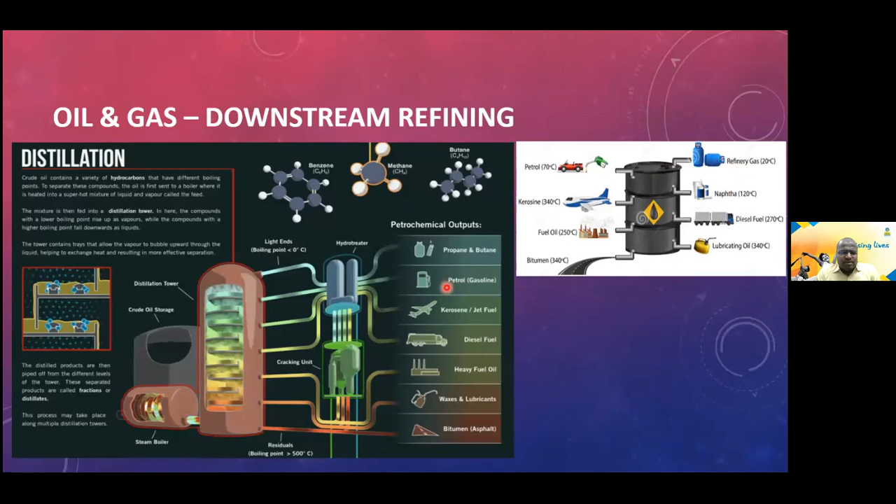Based on the distillation cuts, we do refining and take all the products out from the crude oil. So this is the first basic unit of any refinery, a crude distillation unit.

And this is one sample refinery configuration of BPCL. This is the current configuration - we have got 2 CDUs and 2 trains. So one CDU has a cracker and there is a diesel hydrodesulfurization unit.

And you've got a hydrogen generation unit, and there is a cracker, and we get the lubes. We basically have 3 crackers, out of which one is a hydrocracker, and we make lubes out of it.

Lubes is one of our products, and we also have CCR, continuous catalytic reforming regenerator, which produces maximum hydrogen from our refinery, and we use it for our hydrodesulfurizing units - DHDS, DHT, and hydrocracker - and make the final products out of these units.

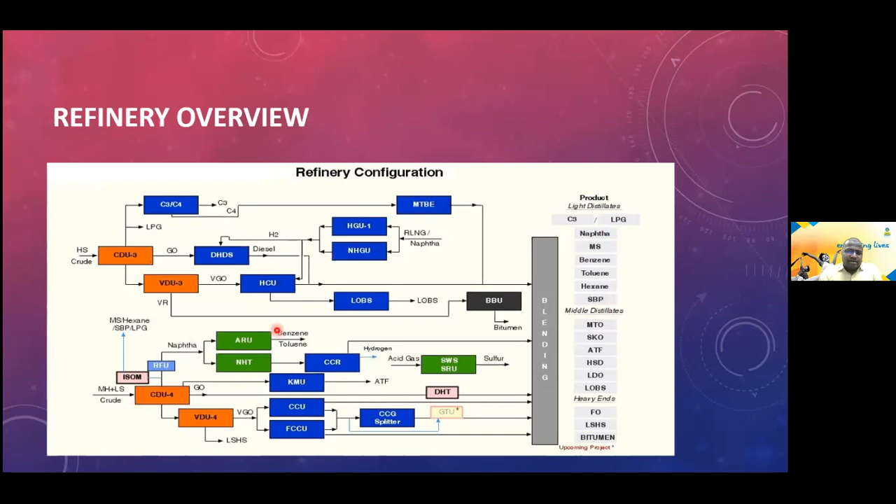It's just a basic refinery configuration of how our refinery looks.

So to begin with, process control. Before going to advanced process control, let me give a small introduction about process control, how it actually works, and how it is known to everyone - just as a refresher, let me explain what is happening in process control.

There is a panel officer, an engineer sitting at the DCS giving a set value, and there is a controller that sees the set value as well as the process value coming from the field transmitter - these are all numbers, like how the current and voltage come into the controller.

So it senses the difference, the set value minus the process value. It takes that error, and this controller, based on the PID algorithm - proportional, integral, and derivative - calculates the manipulated variable. It tries to minimize error. It's as simple as that.

So the set point is entered by a panel officer. The process value is given from the field instruments, and it moves the manipulated variable. This manipulated variable also goes as a signal, a current signal in 4-20 milliamps, and finally goes to a control valve where it operates the control valve.

That current is converted to pressure, what we call I to P, and based on that sensing element, or the input given by this controller, the controller takes action. Once again, the feedback goes back to the controller. So it's a cyclic process.

So we all know how a PID controller works. The output of the PID - proportional, integral, and derivative values - is the final MV given by the controller.

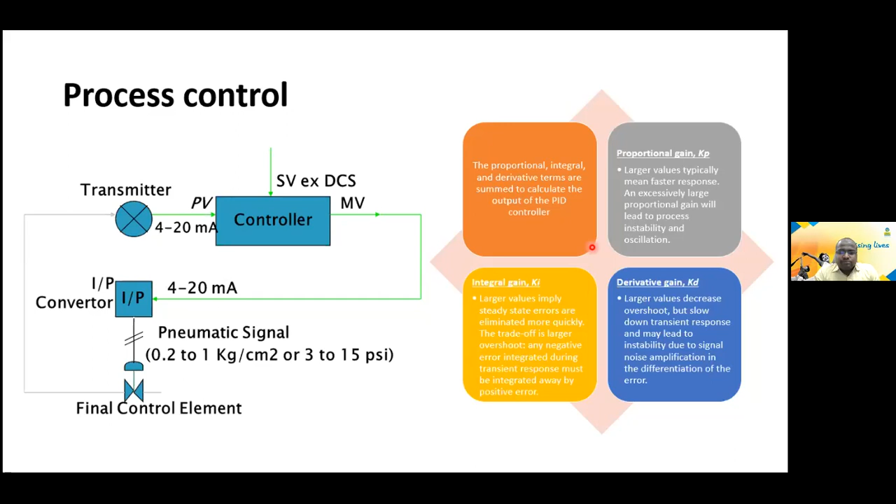It dampens the oscillation, and the controller performs satisfactorily to what is desired. So this is basic about process control.

In a refinery, it's not one process control we have. We have got process control for almost every part of a refinery, like flow control, level, temperature, pH control. There are n number of controllers. In this block, there are many controllers in a single unit, but the action is done by a simple controller, as I explained in the previous slide.

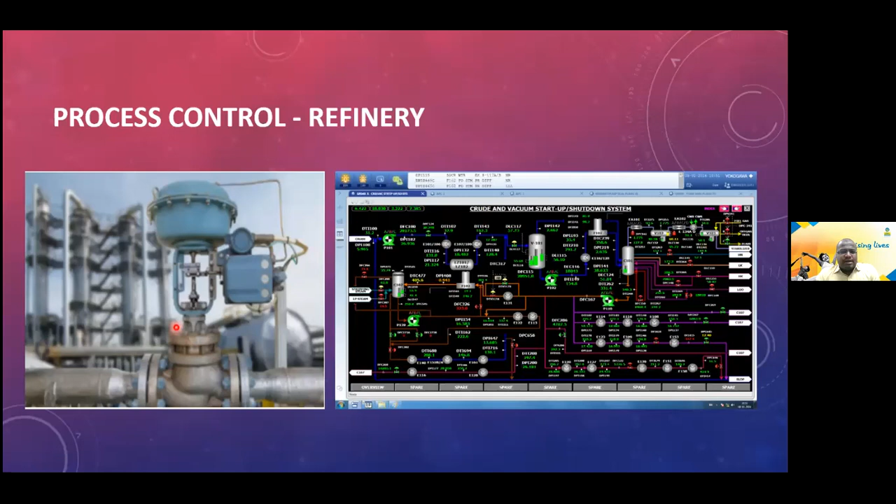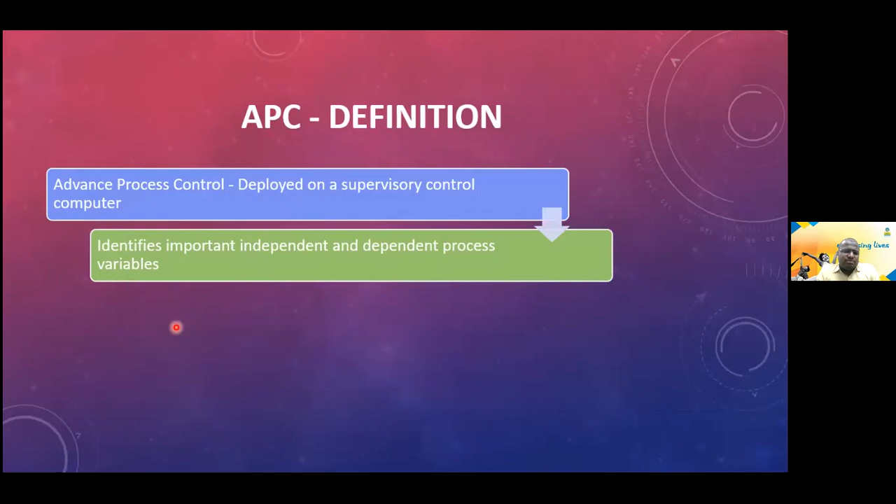So advanced process control, what is the definition? Advanced process control is nothing but a supervisory control deployed in fast computers, like within servers. It identifies the important independent and dependent process variables. I'll explain what are the dependent and independent process variables, and it also identifies a dynamic relationship between the variables that we call as models.

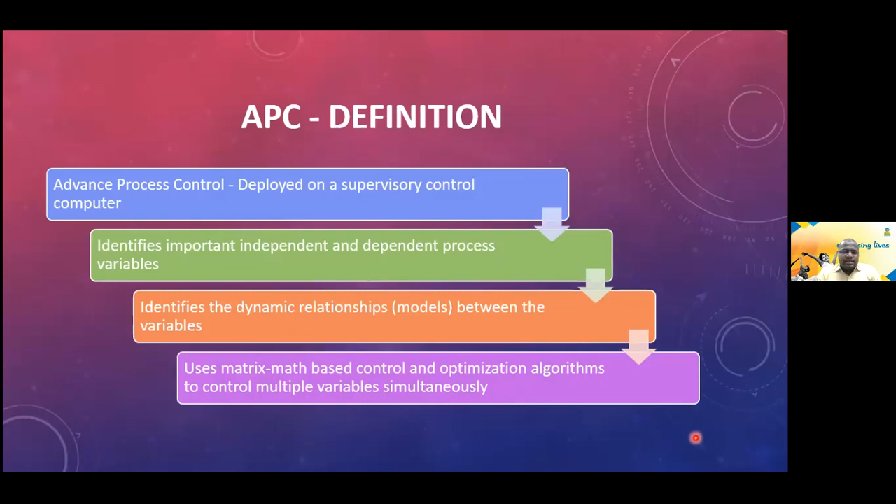First of all, we identify variables which are dependent and which are independent, and we develop a matrix which is called a model, and that model works based on math-based control and optimization algorithms to control the multiple variables, both the dependent and independent variables simultaneously.

So with a very layman example, how advanced process control works. If you see, there is a tub. There is a tub where there are 3 different types of water: water from corporation, water from borewell, hot water from geyser, and there is a temperature measurement you have.

Our objective is to maintain the temperature and to maintain the level according to the requirement, and finally the optimization: consume either bore water or corporation water according to the prices. It's just a practical example. This is getting translated to refinery applications as well.

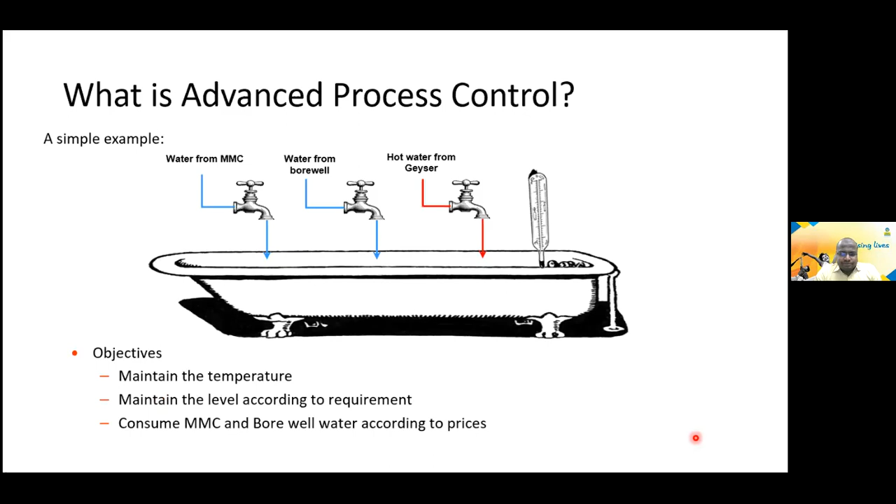So in the simple bathtub example, what I'm trying to say is, first of all, what is the thing we are trying to control? Temperature and level. And we call this temperature and level the dependent variables, whereas the water from MMC, water from the borewell, and hot water from geyser are the manipulated variables or the independent variables.

So we make a matrix, like when 1 unit, 1 ton, 1 meter cube of water from corporation increases, what will be the increase in level and what will be the change in temperature. So we make a matrix out of it. Finally, we solve the matrix every 1 minute and we execute the process. So that is how a simple advanced process control works. It's a very basic example.

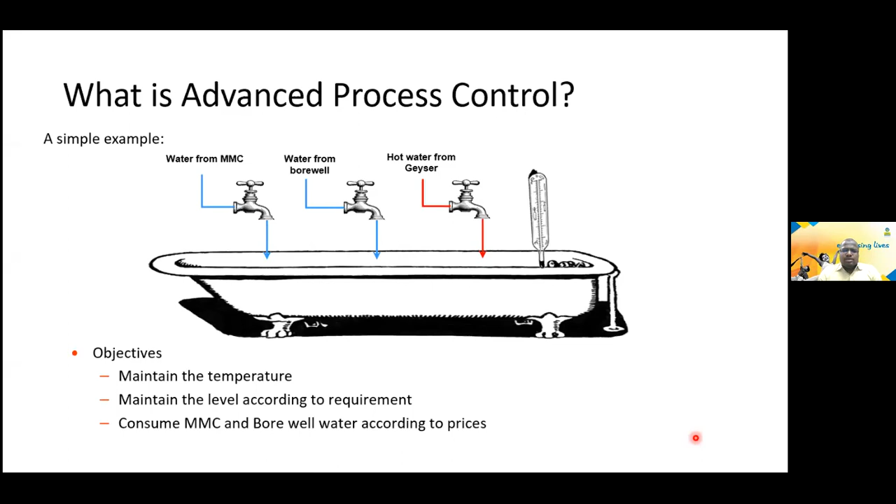Going ahead, what APC does is it takes the operator limit. The operator limit is nothing but the low and high limit set by panel officers. It takes the current measurement, whatever measurement we have from the panel. And there is a model, the APC model, which is working in the background.

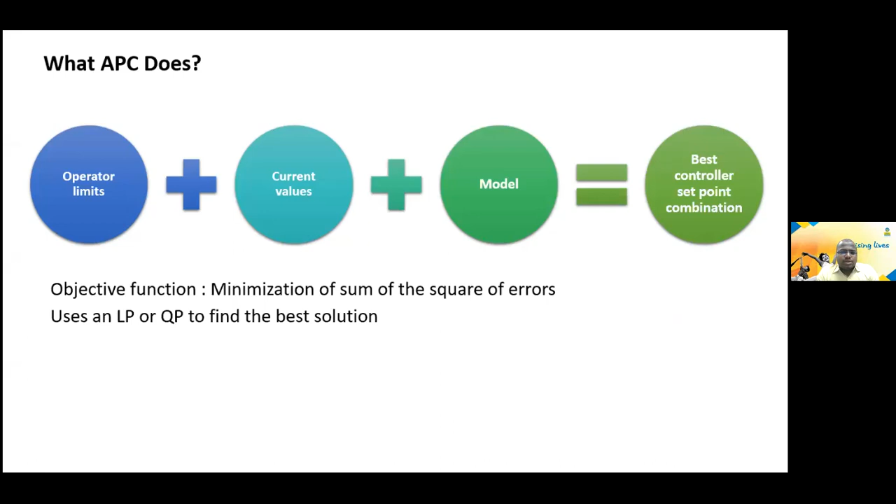It takes all this and gives the best controller set point combination for the process. So it is helping to minimize the errors, and it is using both linear program or quadratic program to find the best solution for this matrix.

So the control phenomena is very simple. Control variable: what is to be controlled? For example, in the bathtub example, temperature and level are the variables which need to be controlled. Manipulated variables: the handles to control. In the example, we could see the water from the corporation, hot water from geyser, and water from borewell were the manipulated variables or the handles to control. And disturbance variable, like ambient temperature or a disturbance from an upstream unit, which can affect the CV, but there is no handle for it.

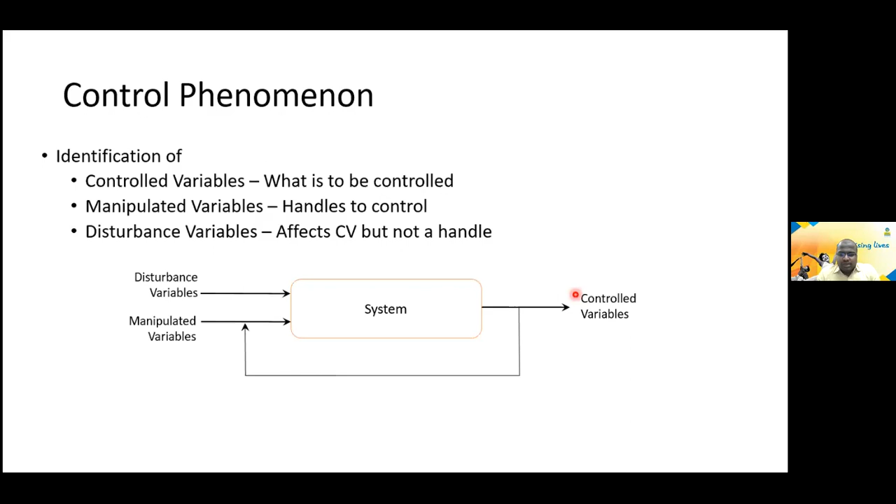So they are the disturbance variables for the process. It's a system, so we've got a manipulator and disturbance variable at the input of the system, and based on that, the control variable reacts, and based on the control variable, whatever desired number we need, we manipulate the manipulator variable once again so that we bring back the system to normalcy.

So explaining the independent variables, there are 2 types of independent variables for any APC, advanced process control. One is manipulated variable, the other is a feed forward or disturbance variable.

Manipulated variables are the inputs that cause a change in the process, which the operator can manipulate or change. In that example, he can change the water from borewell, water from corporation, and hot water from the geyser, but he cannot control the ambient temperature.

For example, the set point to regulatory controllers, valve positions are the manipulated variables. With respect to the feed forward variable, it also has an impact on the process, but we cannot control it. So it creates a disturbance in the process and is not controllable.

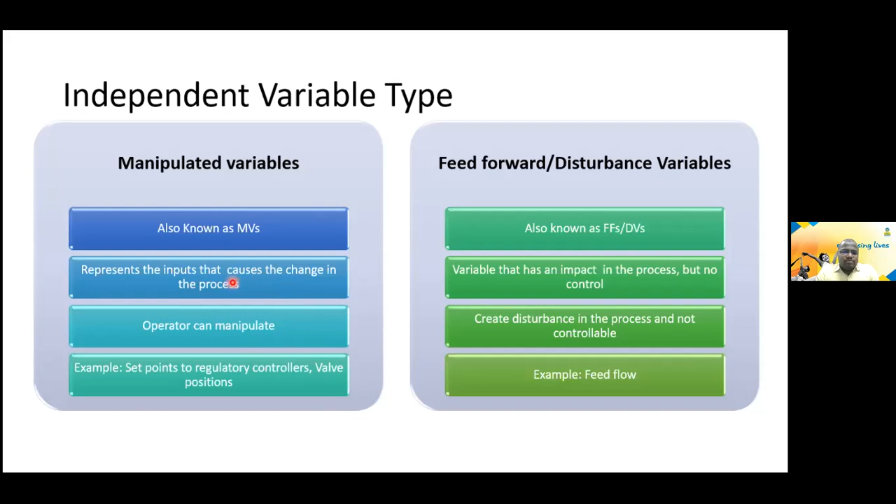Example: feed flow. If a feed is coming from a different unit and going to this downstream unit, that is a feed forward or disturbance variable, which affects the process but you cannot control it. But you can use the manipulator variable as a tool to control that disturbance caused by the feed forward variable.

So finally, the control variables are the dependent variables. These values are the result of the independent variables, which the operator tries to control.

In any operation or process, the main important parameters an engineer would like to control include product quality, temperature, pressures, differential pressure. Some may be constraints, and some may be optimization parameters.

Some with constraints like reactor temperature, reactor bridge wall temperature, arch temperature, furnace skin temperature — there may be constraints which we cannot violate — and optimization parameters like product quality, product yield. So those are the examples of control variables.

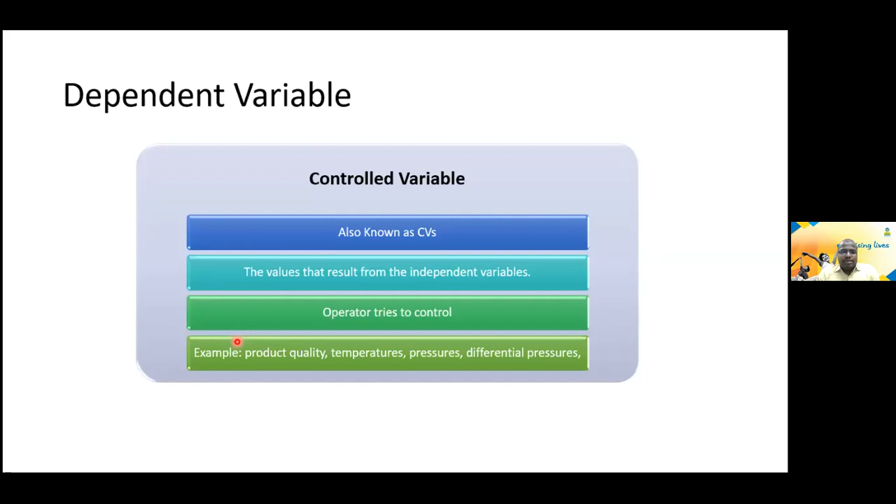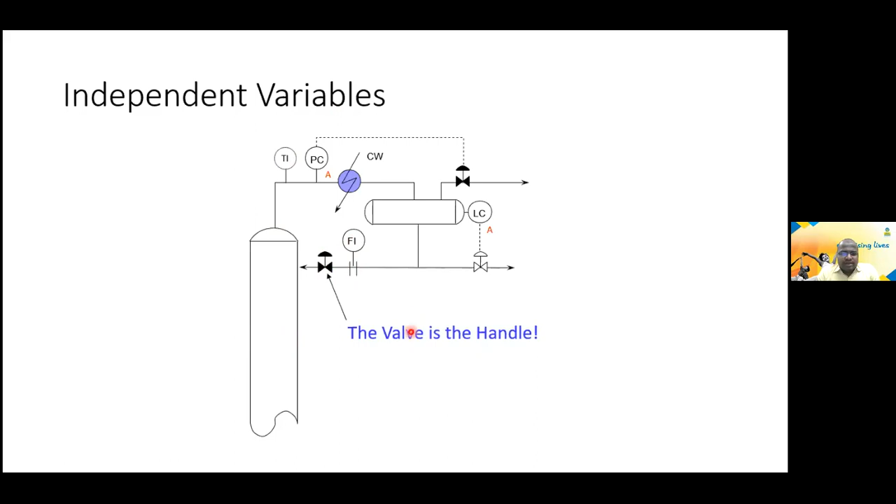Let me explain with a small example how independent variables work. In this case, first see this valve is an independent variable. This is a handle by which this process can be controlled. It's the first step. Now we are promoting that independence to this flow controller.

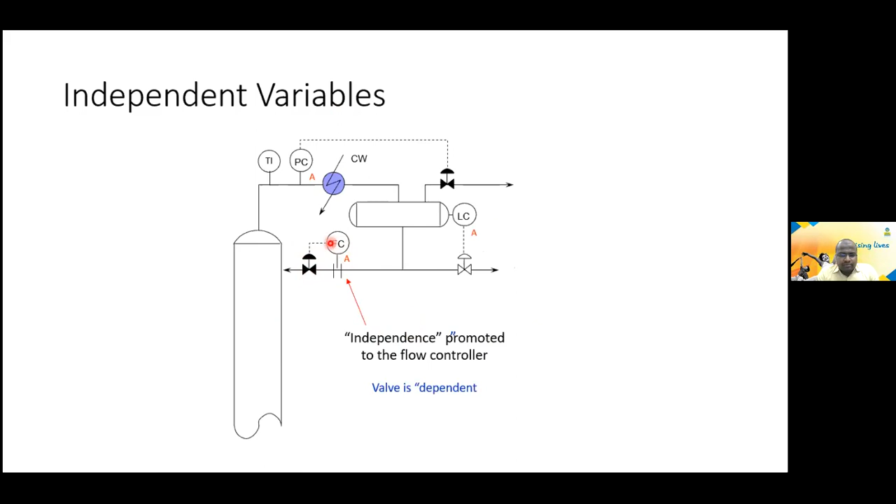Now moving ahead, I'm introducing one more variable like this — a temperature controller. So there is a temperature that is controlling the flow, and that flow is controlling this one.

So indirectly, independence is promoted to the temperature controller, which controls the temperature, the required parameter for the engineer to control for product quality or product yield. Based on that, control is shifted to the temperature controller, and this flow controller becomes a slave, and further its slave is this valve.

I'm also introducing one more independent variable, the cooling water temperature or the ambient temperature. This is a feed forward disturbance variable.

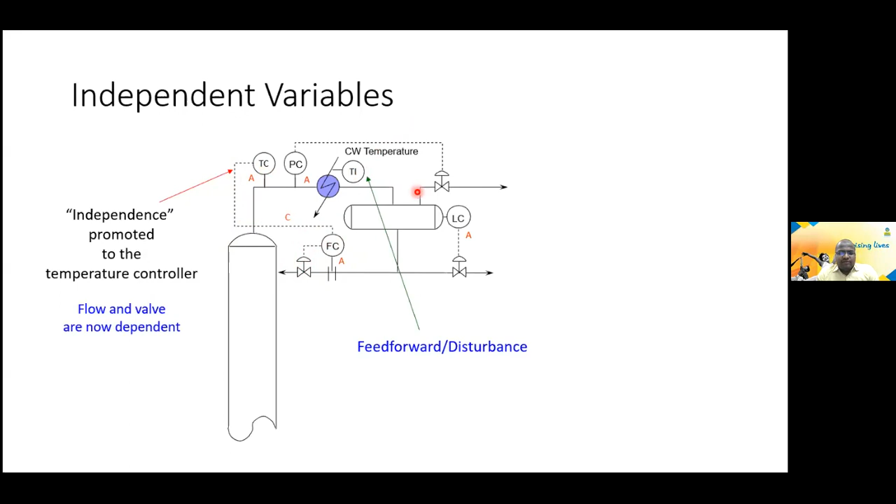So some basic definitions before we go into detail about APC: one is time to steady state, and one is unit response time. These are the two basic fundamentals you need to know when starting any APC project.

Time to steady state is the time taken to see the full effect on the dependent variable when the independent variable is moved from time t0. For example, I'm moving this independent variable, MV1, by a unit — like 1 ton, or 1 meter cube per hour, or 1 meter per second.

So what is the effect on the control variable, and when is that effect completely realized — when it reaches steady state? That time to steady state is a very important parameter to note for any APC model.

Then comes the unit response curve. The unit response curve is, whatever unit change I give to this independent variable, what is the response on this control variable?

Whether when I change this by 1 meter cube per hour, the temperature increases by 0.5 degrees Celsius or 0.01 degrees Celsius, or if it's a flow increasing by 0.3 meter cube per hour, whatever it is — the effect of this unit change in the manipulated variable over the control variable is the unit response curve.

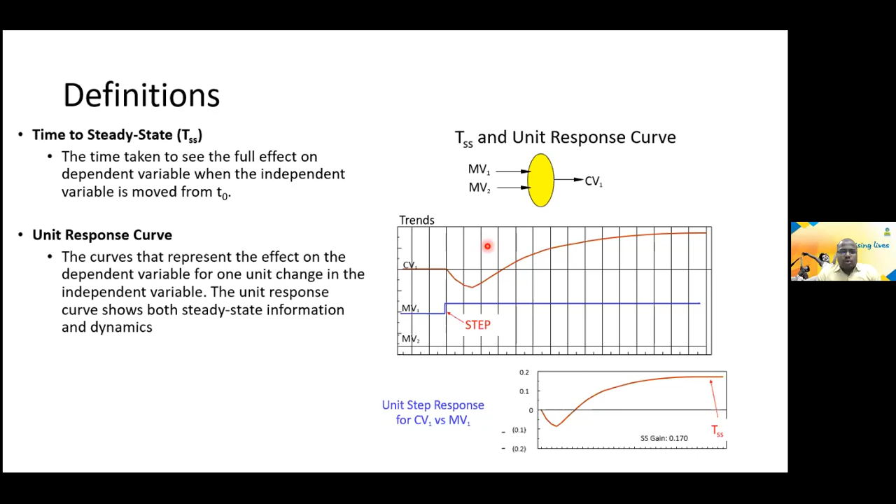When you assemble all these curves together, you form a matrix like this. This is a simple example for one fractionator column where a normal engineer can control only one set point at a time, like steam to reboiler, which he adjusts manually. He can either control top cut quality, the side draw off temperature, the side cut quality, or the reboiler outlet temperature.

He cannot control all together. But in an APC model, when you give this as a matrix, as an input to the APC model, when you just give the set point or the low and high limits for these control variables and independent variables, APC by the matrix or APC with the model at the background controls, and it pushes the unit to the profit.

So without lesser intervention from the engineers, the plant will run to a steady state. First of all, the plant will be controlled, but this involves a lot of understanding of the process first, then about the software, and then your experience in what we call step testing activity, and how you tune the basic PID controllers at the DCS level. So it has a lot of things in the background, but once it is done, it gives a very...

It makes the plant very smooth, so that the panel officer enjoys working with APC. Normally, even when I joined this department, I always had the feeling like the panel officer, even when I was in process, working using the APC, that I do better than the APC engine.

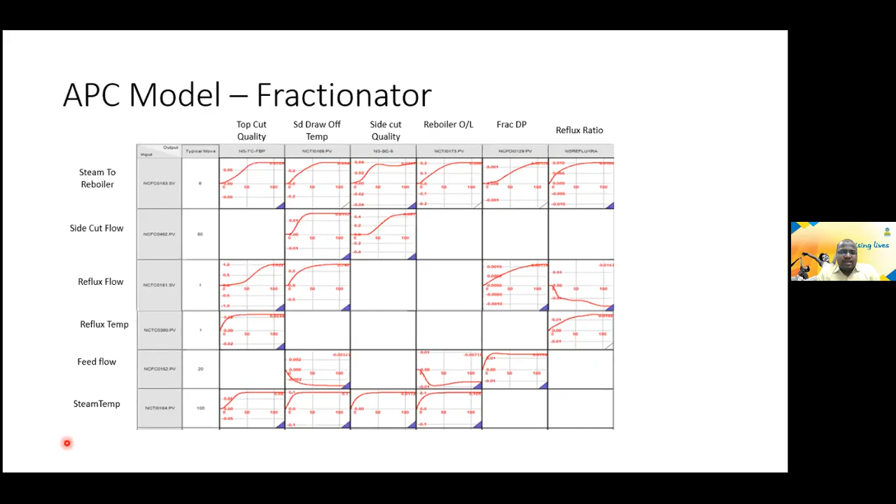I'll just explain a few more examples of refinery cases of how we use this APC to increase our refinery profits.

So how does APC help our daily refinery operations? It maximizes profitability by maintaining 100% uptime, like optimal operating conditions 100% of the time. It increases the unit intake, so you can push the plant to the maximum. You can give the constraints, you don't hit the constraint, but whenever there is opportunity, go to the maximum feed. That is always possible through APC.

You can reduce energy consumption. In the earlier example, you can see that we had both steam reboiling as well as reflux flow. But what is the optimum, either to increase steam or to optimize on reflux? We, as a normal engineer, cannot do that calculation in real time and come out with the number. But if an APC model is working at the background, it can reduce the energy consumption.

It's not just steam, but fuel gas firing, furnace firing, steam temperature - it is seeing all your constraints and pushing your product to the quality, not away from the limits. It is not making your product off-grade, but at the same time, it is using the minimum energy required for making an on-grade product. So it reduces energy and also maximizes productivity.

If you have, for example, a crude distillation column, your profitable components are the diesel components, the petrol or MS components, or the LPG components. The APC can push your plant in such a way that all these profit-making products will be increased, the yield of these products will increase, whereas the lesser profit-making products like your residue yield, your gas make, those things can be minimized using APC strategies, but it is bounded by the constraints.

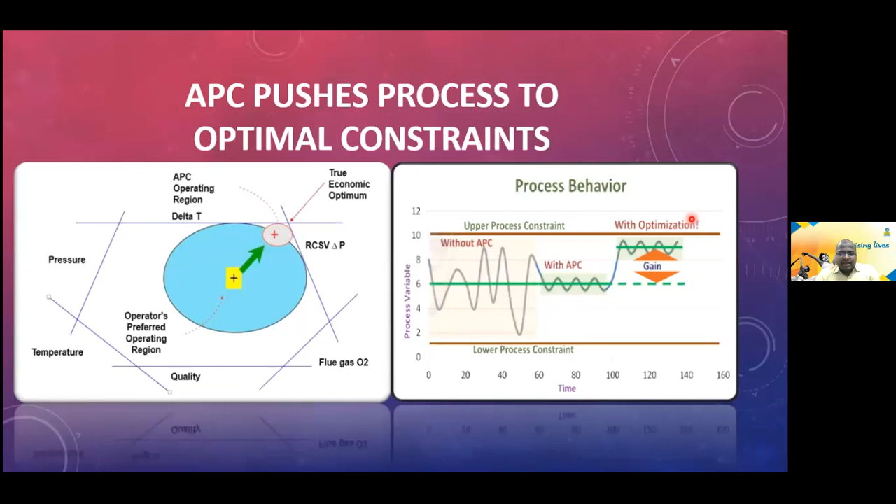So without APC, the plant behaves erratically. With APC, first of all, it controls the process, and then it pushes the process to the maximum, to the profit margin. That is how an APC works, and that is how it maximizes refinery profits.

I'm going to explain two examples. One is a refinery example of CCR, continuous catalytic reforming, and the other one is diesel hydrotreater. First, I'm going to talk about continuous catalytic reforming and regeneration, what APC strategies we have currently in place, and how we are leveraging it to our maximum profits.

It's a simple PFD of a CCR unit, where we have reactors in series. The reforming reactions are endothermic, so we have a heater in between the reactors to bring the temperature back to the reactor temperature of around 515 to 563.

After the reactor, it goes to a plate type exchanger, and then it recovers maximum heat out of it, where the feed is preheated using the fourth reactor outlet, and it goes to a separator. From the separator, the gas is getting circulated back to the reactor section, and part of the gas is taken out as called HP compressor or high pressure compressor.

By mass transfer, we are trying to remove the heavies from the gas phase to the liquid phase, and the lighters from the liquid phase to the gas phase. Then it goes to a chiller, and then it goes to hydrogen, because in the reforming reaction, you always generate hydrogen.

So we have a PSA, pressure swing adsorption unit, and a chloride guard because the catalyst has some chloride, which is poison to the downstream unit. So you've got a chloride guard adsorber, and the hydrogen, of almost 99.9% purity, comes out of this section.

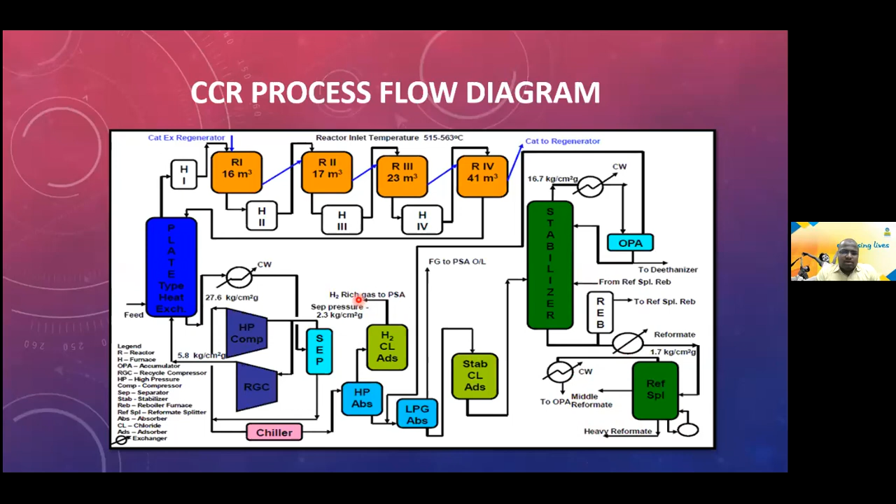This unit is always a profit-making unit, like CCR. So pushing the yield - when the benzene demand is high, when the toluene demand is high, maximizing middle reformate. When the MS demand is high, maximizing heavy reformate. And hydrogen is always a product coming out of this unit. So optimizing this unit is very important for the refinery margin.

So these are the various sections we have got in this unit, and we have implemented APC in almost all the units.

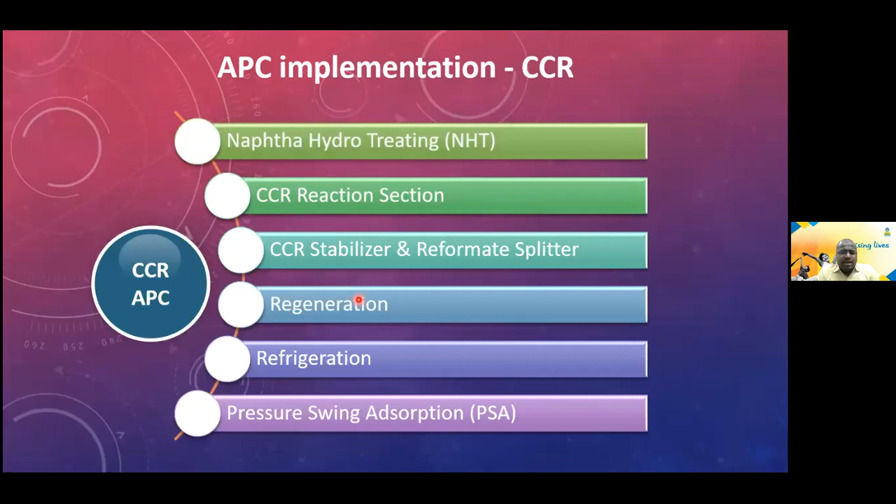So in the first section, our main objective is research octane number. Like I already said, it's one of the important components for making gasoline. So we may maximize RON by optimizing the reactor temperature. We also increase the octane barrel by optimizing the reactor temperature.

And we have this hydrogen to hydrocarbon ratio, because the recycled gas which is getting circulated through the reactor section, if you spend more energy, you're heating the gas once again. So where we spend more energy, we're also spending more energy in recycling it. So in both the cases, we will get good profit if we optimize this hydrogen to hydrocarbon ratio within the desired limit.

If you're going less, your coke formation will be more, so that is not desired. But if you're going high, the problem is that it acts as a heat sink, as well as you're using more steam for the recycled gas circulation. So we get profit on both. It's profitable to run in a very optimized way.

Then coke, in CCR you make coke. It's a continuous regeneration, so you make coke on the catalyst. How to control the activity, like how to move the catalyst from one reactor to the second reactor, and how to optimize oxygen in the coke bed, because you cannot put more oxygen; it will lead to a runaway reaction. It will damage your regenerator. How to avoid such damage and control your process—that is a big challenge which we have in this process.

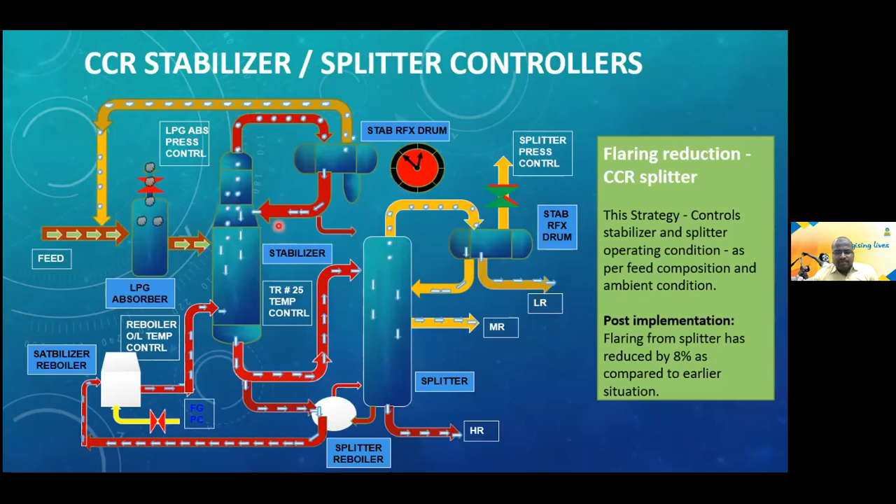So apart from this, for all other sections, we could achieve some benefits, like in NHT, 1 to 2 tons of fuel gas, based on the product sulfur. We got a sulfur analyzer at the outlet.

Seeing the sulfur analyzer, NHT reactor temperature is adjusted automatically by APC, and we could achieve some savings. In CCR, we already improved the reformate yield, heavy reformate yield to 2.3%, and octane barrel also increased almost 3%. Then in CCR, there's 35 tons of fuel gas reduction, both by flaring and by optimizing the reactor temperature.

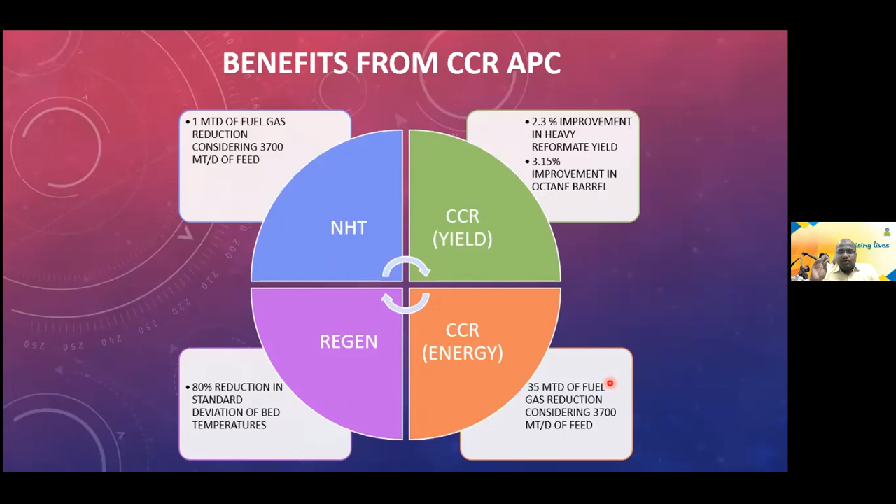This is based on the desired octane. Because if you increase the reactor temperature, what happens in CCR is it goes to cracking mode. Instead of reforming, it does cracking, and you lose more of the heavy rich reformate. Instead of making reformate, you make LPG. So we optimize the fuel gas firing in the furnace, not the fuel gas composition. We optimize the reactor temperature so that whatever RON was targeted, we could achieve it, while also reaching the desired octane and desired products like heavy reformate yield.

We could optimize fuel gas savings, and also the bed temperatures, the reaction bed temperatures. We could reduce the standard deviation, as I already said, because APC first does the process control and then optimization, so it controls the bed temperatures. We could achieve almost an 80% reduction in standard deviation using APC.

So now going back to the second unit, which is a diesel hydrotreater unit, I will explain the strategy we adopted for APC. If you see, there are two sections in the reactor, so there are two temperatures: one is the reactor inlet temperature, and one is the first bed inlet temperature and the second bed inlet temperature.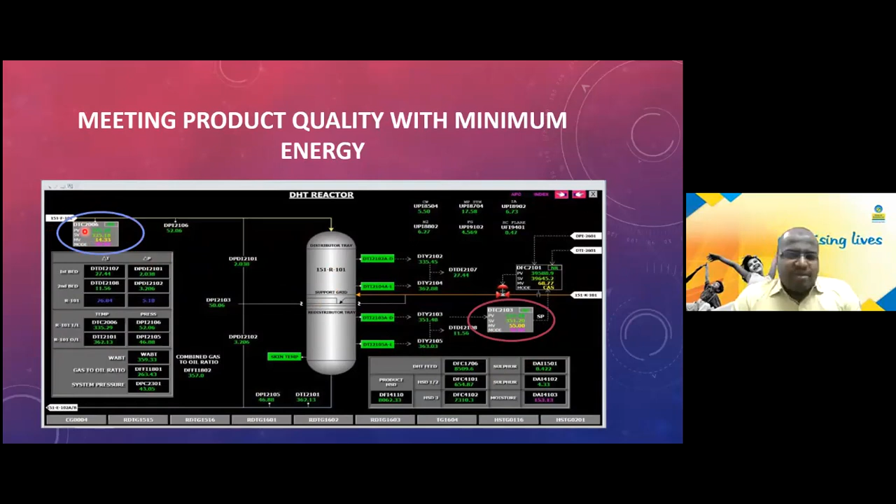Our ultimate objective is to control sulfur. So by optimizing both these temperatures, we need to obtain the desired sulfur. These temperatures are dependent on the firing. When I increase this temperature, it increases the firing on the furnace, and when I reduce it, it reduces the firing. So what APC does is, I have given these as my manipulated variables for the reactor.

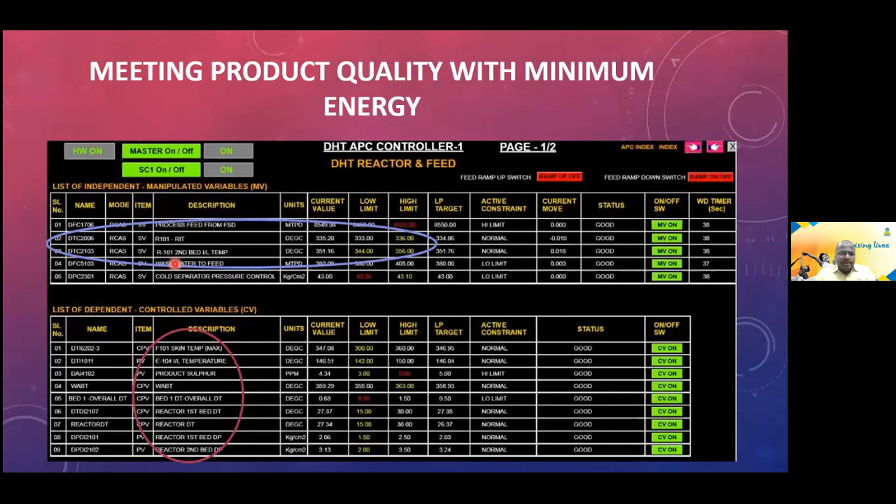Let's see this example first. So reactor temperature is my independent variable, the manipulated variable, and product sulfur along with a list of variables like skin temperature, WABT, first delta are the constraints apart from sulfur. So apart from product sulfur, I've given some constraints also: don't violate these constraints, but at the same time make a good product, with product quality maintained using less energy.

So what APC does, once it reaches the desired limit, for example in this case the current value is 4.34, whereas the high limit is 5. So APC is telling us to reduce the reactor temperature of the first bed, while the second bed is increasing to maintain the delta T. So it reduces the reactor temperature, which in turn affects the furnace firing, reducing it, and makes a product of minimum quality giveaway while optimizing the fuel gas firing in the furnace.

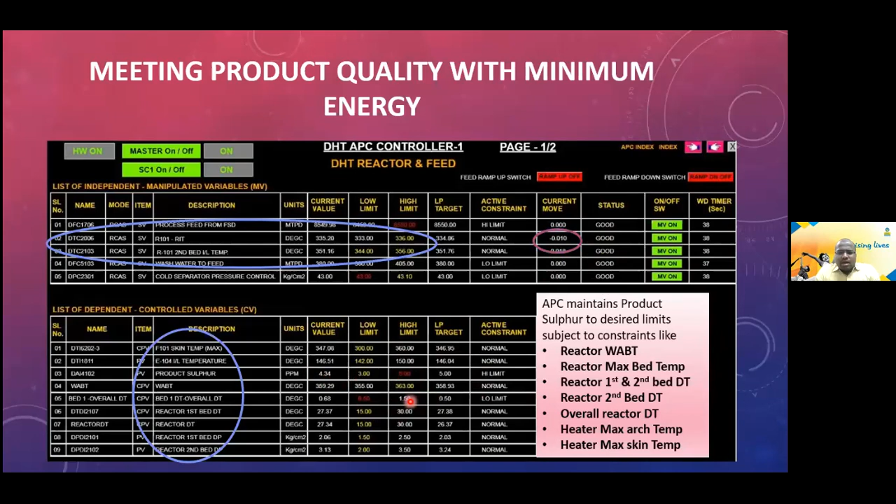So this is the reduction in furnace firing. Now, how does the APC engine work? It's essentially a box that does three things: one is prediction, second is steady state optimization, and third is dynamic control.

The plant operator or plant engineer enters the limits and targets. He enters low and high limits for independent and dependent variables, and also the targets, like the sulfur target is this much, my SOx emission target is this much. He enters the target from the DCS, and apart from that, we also introduce some cost, saying that firing fuel gas is costly so don't use it excessively, whereas feed should be maximized, so it's a positive or negative number.

We introduce cost to the variable, and as the APC admins, we also have some tuning constants, like move suppression, max move, steady state value, steady state move limit, or the cost factors like LP cost. So we give these tuning constants, and the APC engine takes all these as inputs, and it gives the move or CV values, like what the current values should be.

As I explained in the process control example, one variable based on the difference between set value and process value, the controller is giving a set point. Controller is giving a manipulator, like valve opening. Similarly, this APC model, taking all these as inputs, understands the process and gives a set point to the DCS through OPC. It gives set point or output values to the DCS.

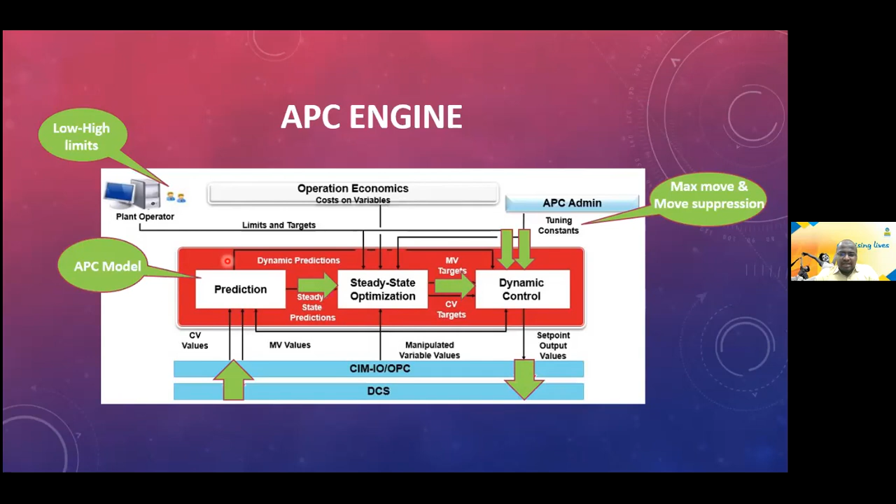So DCS set point is entered, limits are entered by the panel officer. There is a dynamic APC admin entering the max move suppression, and all these inputs go to the dynamic control. The APC, I already shown a matrix, which is nothing but an APC model. It predicts what will be the CV moves or the independent variables' future moves. It goes to a steady state optimization engine, then to a dynamic control engine, and finally gives a point to the DCS. This entire process happens every 1 minute, and it optimizes the process.

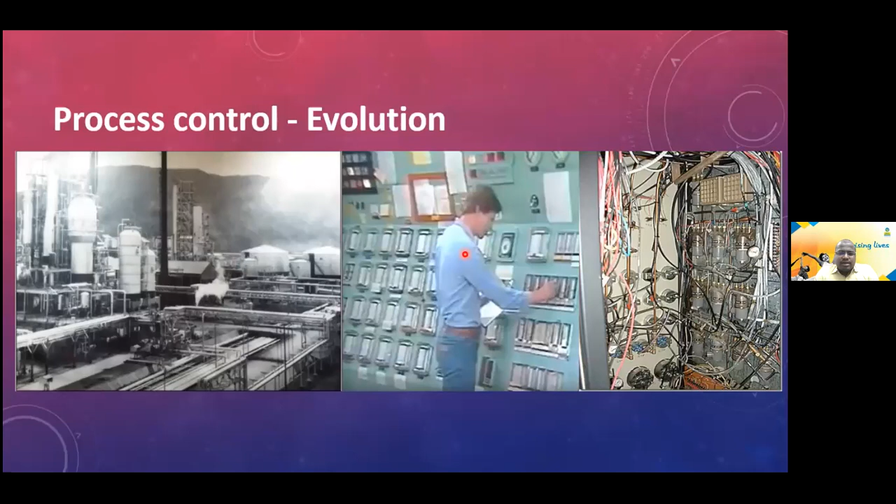To give a brief about the evolution of how APCs evolved, this was how the controllers were earlier with complex wires. Even now there are complex wires running in the background which you don't see, and they were all pneumatic. So people would go into the panel just adjusting the pneumatic controls and taking actions.

These were the first DCS pictures. In 1989, our refinery had the privilege of using, like Charles Cutler - you all know he's the father of advanced process control. He first started a company called Setpoint, which was then acquired by AspenTech later and became DMC or DMC3. I did not have that opportunity, but my seniors who were in APC or earlier in this section worked with Charles Cutler, and they could do the first APC implementation in our refinery. It was for a cracking unit. So we had a first-hand experience of how to work with APC initially.

Now we have moved - this is just an example of a Yokogawa system - from traditional machines where people used to use pencil and paper to advanced latest computing technology. Now engineers don't sit with pencil and paper; they use all the software available to them to make this process control work perfectly.

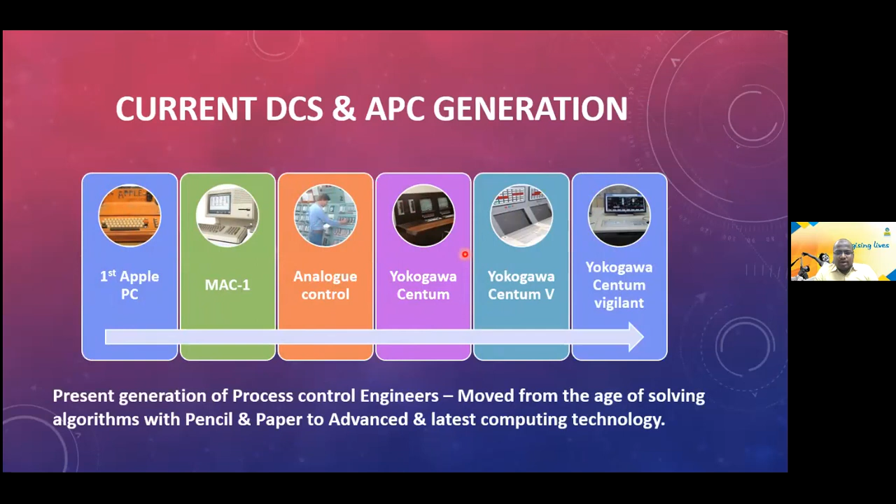Going back, my next topic will be the inferential quality prediction or soft sensor, which is being used in refinery. Why do we need inferential prediction of soft sensor? There are many reasons for it. The main reason is you have many products, like fuel gas, LPG, motor spirit, gasoline, diesel, furnace oil, bitumen, coke - whatever product - and all products have got different specifications to get certified in the lab. If you need to have analyzers for all these products, you will require almost 10,000, or based on the refinery size, you can even require almost 1 lakh analyzers for a refinery, which is completely impossible. Also, the costs of maintaining these analyzers and AMC to maintain them are also very costly.

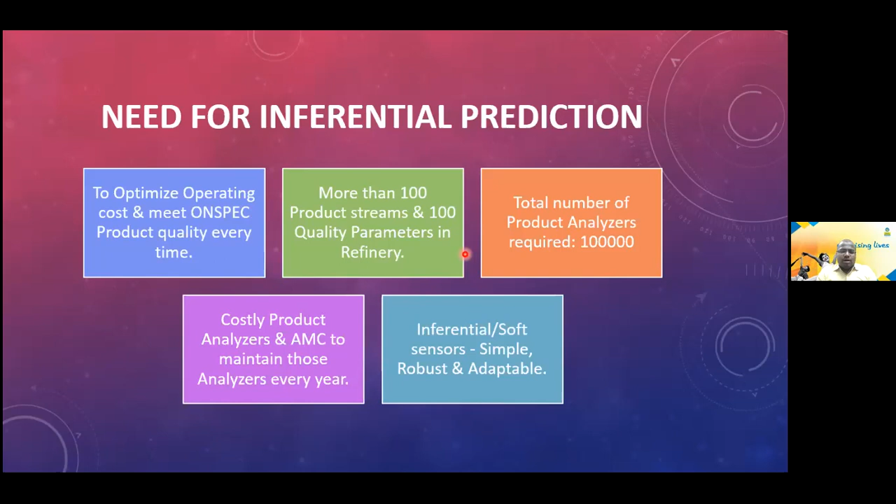What the inferential or soft sensor does is it takes the process data, it takes the lab result, it combines both, it develops a model, and that is the soft sensor. It is simple, robust, and adaptable.

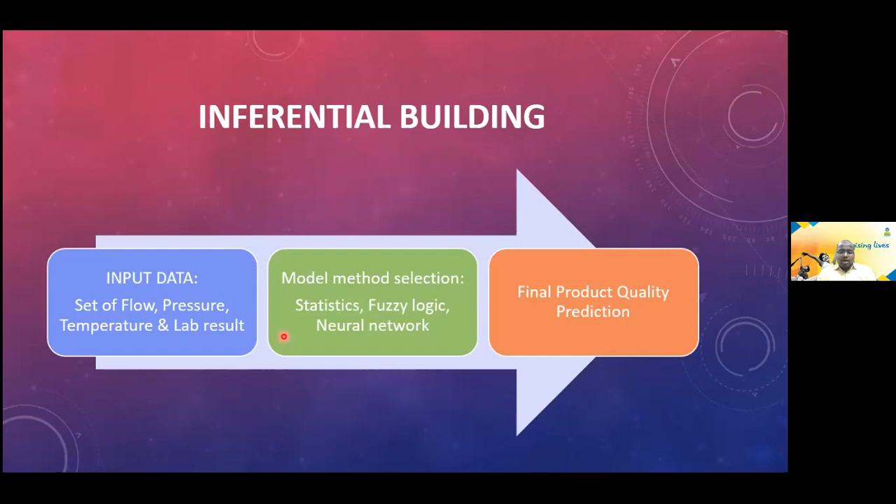So what is the process of inferential building? We first take the data. In any refinery or process unit, only 3 data points are available: flow, pressure, and temperature. We use all these 3 components, and we have the lab results. We take some 100 samples, or 60 samples, or 70 samples. Combining both the process data and the lab result, we make a math model. It may be statistics, it may be fuzzy logic, or currently using neural networks, and we make the final product quality prediction.

So what are the inferential qualities we have in refining? For sulfur, flash point, freeze point, RON, distillation, percentage purity, RVP, apparent H2S and amine. For all these qualities, currently we have soft sensors.

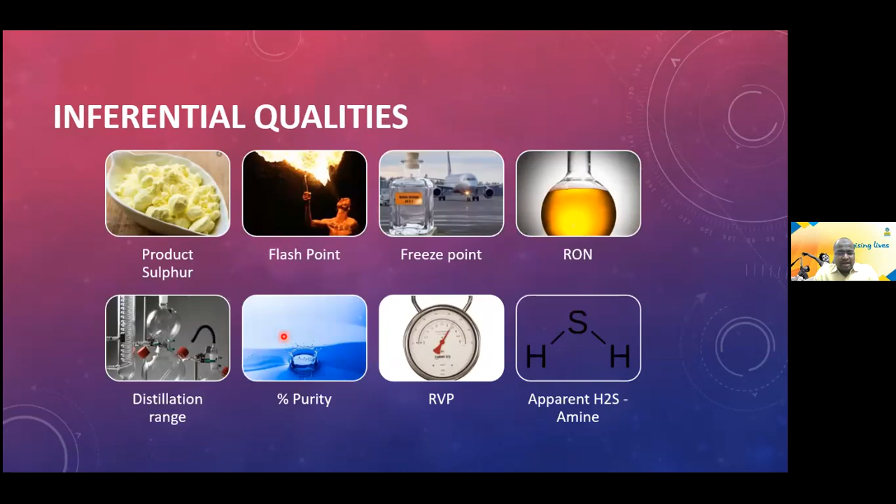Research octane number, one example. What are the various temperature and parameters we take for research octane number? In our case, we take the reactor temperature profile based on all the reactors, delta T across the reactors, then hydrogen to hydrocarbon ratio, and splitter column conditions, which is the final column where the reformate comes out.

And combining all these, we make up the inferential, and this is how the inferential predicts with lab. So it's almost matching lab, and it avoids usage of an analyzer. It reduces the analyzer requirement.

Similarly, for RON, we can also make inferential for any quality parameter. So it helps, like if there is a quality parameter available in real time, I can optimize. I can use it in APC, in advanced process control, and increase the CCR HR RON.

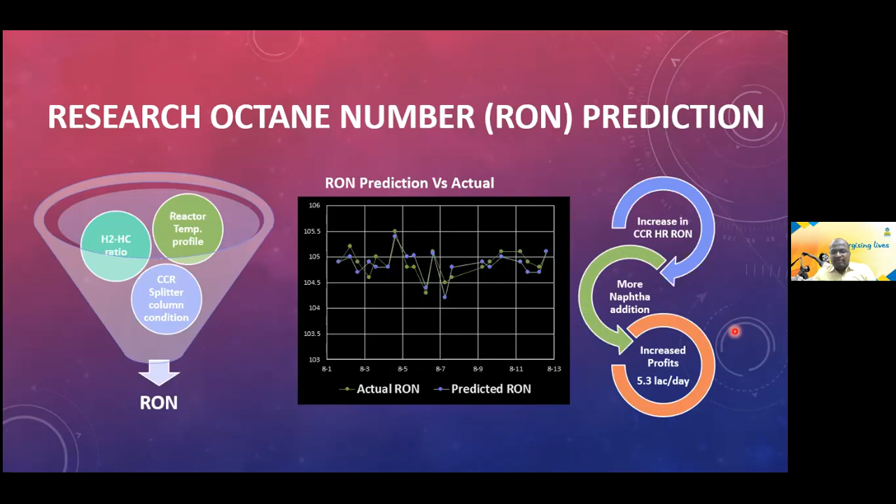I can absorb more naphtha, because heavy reformate is an important component for gasoline. More the RON and more the naphtha absorption, and we could achieve almost 5 lakh per day by using this inferential prediction.

Now coming to splitter bottom IBP prediction, this is a feed to the continuous catalytic reformer. Heavier the feed to CCR, the more the heavy reformate generation. So predicting this quality was very important for CCR when we did this project.

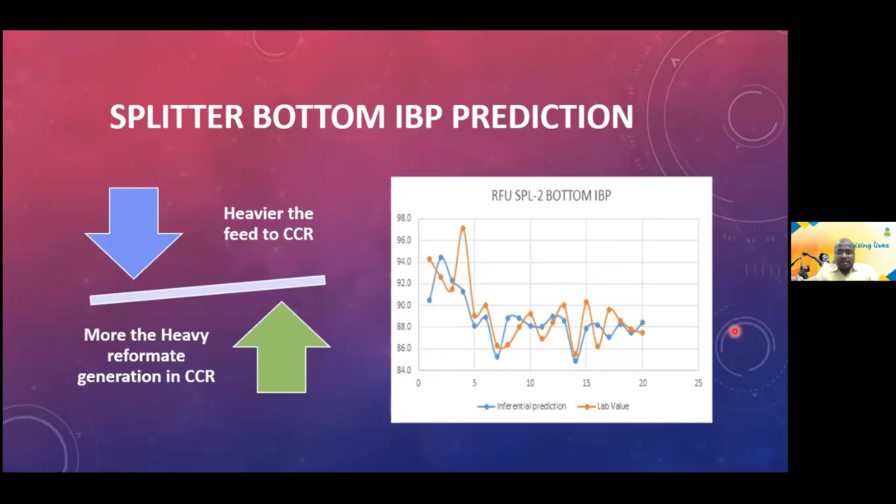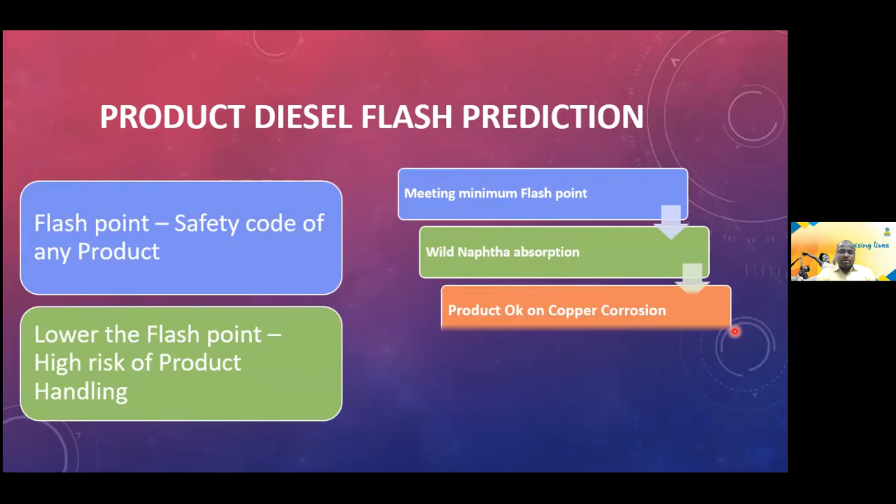Product diesel flash prediction. You all know flash is one of the important safety codes of any product. Lower the flash, higher the risk of product handling. So meeting minimum flash point while absorbing naphtha, because you can absorb naphtha if you know the flash of your diesel, you can put more naphtha.

For flash, what we do is we optimize steam in a stripper, but when we optimize steam, if there is H2S carryover, that will cause copper corrosion. So we need to consider in totality, not only flash point, also copper corrosion, also the naphtha absorption, and finally reduce the steam consumption. If you have a real-time measurement available, you can do all these things and reduce the quality giveaway in HSD.

So what is the future, and what are the current projects we are undergoing? As I already said, we almost covered the entire unit with APC. Almost 100% of the process units in the refinery are covered with APC. So we were even conferred some Frost and Sullivan Digital Awards. 100% APC implementation was one of the important criteria for assessing the digital preparedness, where our refinery is well ahead of our peers.

So now after implementing APC, what is the next step? We are now in the process of developing digital twins. How do we do it? Here, for a CDU model, I'm just explaining how we have done that.

So we take the crude type and crude quality. We have got a patented product called BPMARC. We take density, sulfur, viscosity, and MCRT of any crude oil, and we can characterize that crude assay. So we can have the quality parameters of the crude as well as the products coming out of it using that software, and that is fed to a simulation model, because the BPMARC product works in a steady state, like for 1 atmospheric pressure, called standard pressure conditions, whereas the simulation model takes the absolute plant conditions, the absolute temperature and pressure of a column.

So it goes to the APC console. The output is mainly quality parameters or the yield, whichever is maximum that can come out of this crude. It goes to the console, and APC in real time sees this, and there is an online interface where both models are scheduled to run. It takes the process data for running, and also throws back the result. APC, based on these inputs, takes action and pushes the refinery to maximum profit. Since crude is the first point of any refinery, pushing the unit to the profit margin is one of the important criteria, and we do that in real time now.

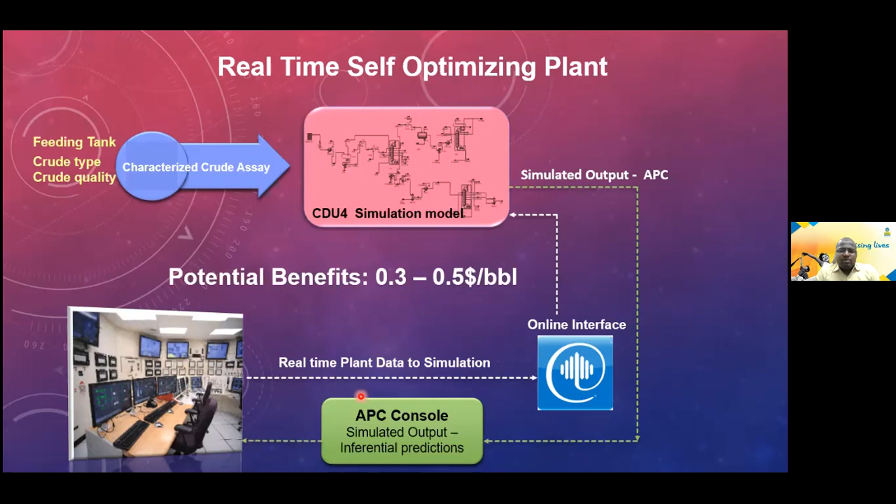So for both the crude units in our refinery, we have this digital twin running very successfully, and we have integrated it with APC as well. So we could get a potential benefit, it's very marginal, but still it's real time. We are able to sense this benefit based on the various crudes we are processing. And now the case for which we were conferred as one of the finalists for the hydrocarbon processing award is for this amine treatment unit.

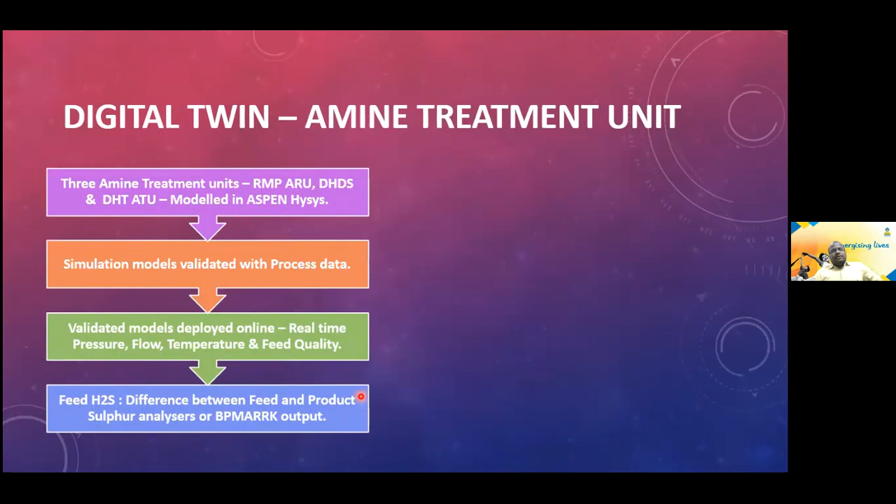So amine treatment, or amine regeneration unit, whatever you call it. What's happening in the process is there is an amine regenerator. Amine is used in refinery to absorb H2S. H2S is generated from sulfur. So crude sulfur goes to different cuts, different products like diesel hydro treating unit, or diesel hydrodesulfurization unit, gasoline treatment unit, or VGO treating unit. Wherever we treat sulfur, it becomes H2S. We use hydrogen to convert sulfur to H2S, and that H2S needs to be absorbed.

We use amine. What we do with this amine which is rich in H2S is put it in a regenerator. We put steam, we take out the acid gas. You take this acid gas to your downstream sulfur recovery or tail gas treatment unit, where you remove maximum sulfur out of it, and the rest you incinerate and send to atmosphere.

And what happened earlier is, we were put a challenge, or a question like: how do you optimize steam for varying crude sulfur? When your crude sulfur varies, are you optimizing steam in real time? That was a question put forward by our top management, and we came out with the answer: no.

So what we could do is optimize steam in amine regenerator units based on the crude sulfur. How it affects us is: when the crude sulfur increases or decreases, your downstream process units like DHDS, DHT, hydrocracker, there also your amine absorption or amine H2S absorbed in the amine increases or decreases.

First, what we did is we optimized the amine circulation. So the usage of amine itself we reduced based on the feed sulfur. With that, we could reduce the feed to these units. That was the first point.

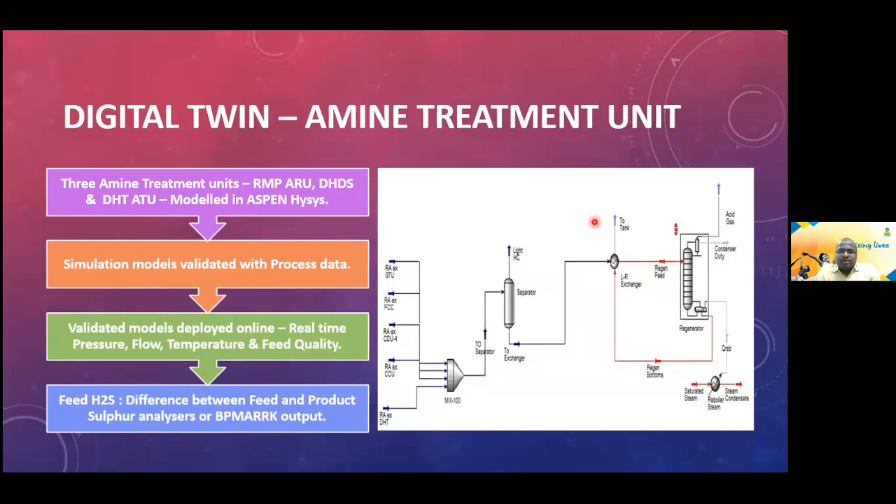So we developed simulation models for the amine regenerator units. We first validated the simulated models with process data, and these validated models were deployed online using Aspen Online. Using real-time pressure, flow, temperature, and feed quality, we could predict the H2S, and we could also use this prediction for the APC, where advanced process control optimizes the steam to these regenerating units based on the estimates coming out of this unit.

This is one of the cases we developed recently, and we could achieve good steam savings of almost 50 to 70 tons per day in real time. It not only predicts apparent H2S, it also predicts the acid gas generation, which is helpful for downstream units like sulfur recovery or tail gas treatment, because sulfur recovery units are a bit tricky. If you don't know the composition at the upstream, you will end up either making black sulfur or choking your SRU condensers. So this information is very much essential for the downstream units. That also we can provide. Apart from that, we can do significant steam savings in this unit.

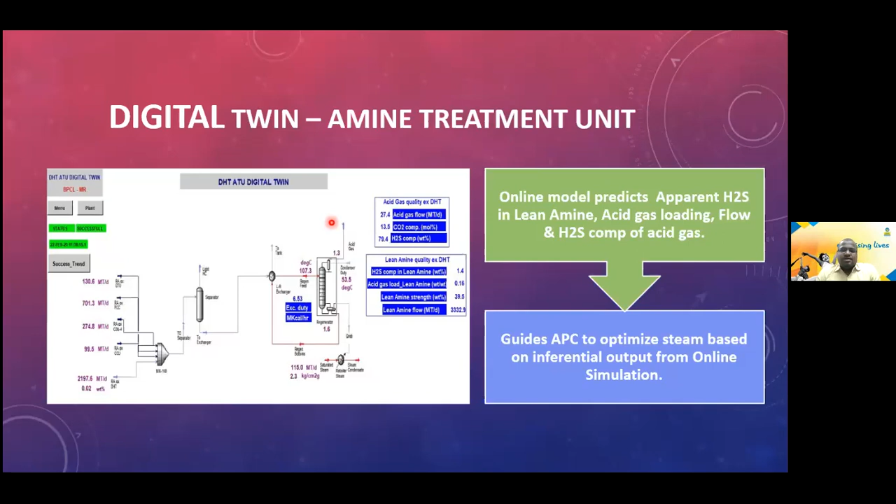And finally, before I conclude, I'd like to point out some opportunities in this field which new or upcoming chemical engineers can always look into. First of all, we don't have an indigenous APC engine or a PID tuning software. So as of now, even if it is there, we haven't licensed it, or we are not using it as a standard product. So any process engineer can work on it.

We can develop an indigenous APC engine, because we are spending crores of rupees and dollars for APC licenses from foreign vendors, which we can avoid if we make an indigenous APC engine. Also, PID tuning software for process units always comes in handy, and people can use it to its full potential. It will always have a market as long as the refining or process sector exists. PID tuning software and APC engines will always have life.

Secondly, we don't have enough service providers for existing APC software, for both new projects and maintenance. Some companies like Honeywell have their own engineers, but others like AspenTech use ISPs, service providers, for execution and maintenance. In India we find fewer of these. So there is opportunity for people to work in that area as service providers for existing software, and grab new projects to work together. If you look at the difference between a licensor providing support and a service provider providing support, with the cost factor involved, there is very good scope with service providers.